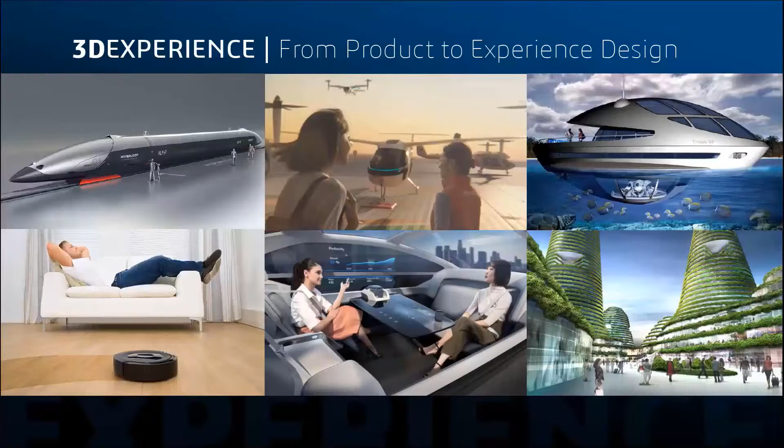Consumers all over the globe today expect holistic consumer experiences. Realizing this paradigm shift, companies have embarked on a journey to move away from simple product design to a delivery of much more sophisticated consumer experiences to the market. This also means a shift to a more human-centric design approach, as a wider scope of parameters of human interaction need to be considered when designing them.

In this new age of consumer experience economy, companies are challenged in many ways. First of all, they need to make sure to transform from classic product to human-centric experience design to gain or keep the necessary edge in creativity and innovation required to reach a leadership position in any market or niche today. Secondly, customer loyalty and a strong brand identity are vital to increase and sustain high revenues and profit margins, which is why design quality and efficient homologation processes are of biggest importance.

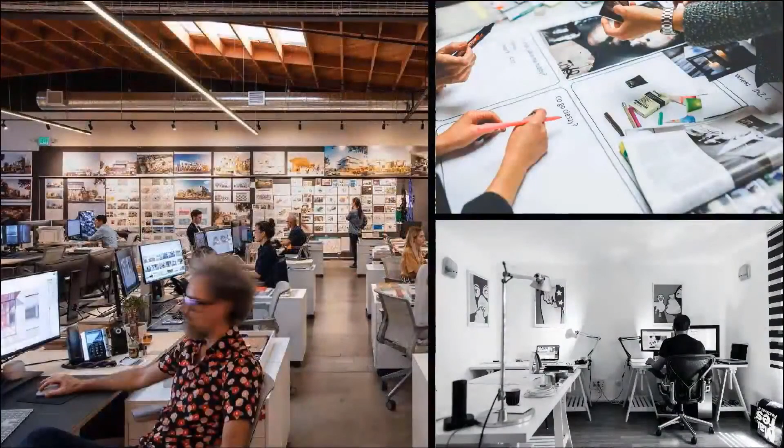Last but not least, the sheer number of products and experiences the markets are expecting today requires streamlined and agile design, engineering and manufacturing processes. These cannot be achieved with silos or stakeholders inside and outside of a company's ecosystem being disconnected. One of the most important people and organizations to drive this paradigm shift are those we consider nowadays at the forefront of innovation, designers and design studios.

In a historical context, this is a relatively new perception. In the not-so-distant past, industrial design used to be an afterthought, a means to improve the aesthetic perception of a product, to make it appealing, but hardly at the core of the innovation process itself. Consequently, designers were only given a limited upfront responsibility in a very narrow area of the product development process.

Today, designers have a much bigger role and responsibility than ever before. Their role is considered key to define new exciting customer experiences that make a difference between success or failure for a company. How do we in Dassault Systèmes tie into this picture, you may ask? And the answer is quite simple.

By definition, the purpose of Dassault Systèmes is to provide businesses and people with 3D experience universes to imagine sustainable innovations capable of harmonizing product, nature, and life, which sums up some of the core aspects of what designers are trying to achieve today.

One of the keys to this harmonization is to reconsider the foundation of how products or experiences are conceived. Thankfully, some foundational work was already done in the 60s. These efforts culminated in the creation of one of the most widely accepted methodologies of structuring creative processes today, called design thinking. While it would be going beyond the constraints of this presentation to explain design thinking in depth, we will try to simplify.

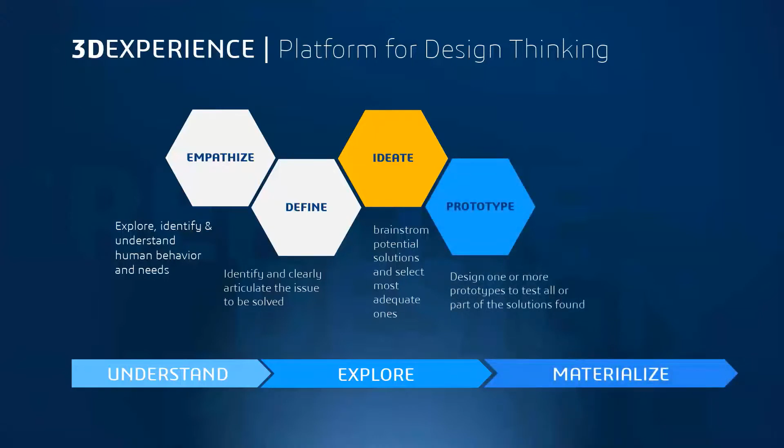In the ideate stage, we explore the available solution space to address the problem identified in the previous stages. In the prototype stage, we create first prototypes which incorporate parts or the full solution to the problem. Finally, in test, we verify the prototypes. This will lead either to their acceptance or rejection and a loop.

It should be obvious by now that design thinking requires a multidisciplinary approach based on intense collaboration, sharing of know-how, breaking conventional silos, and substantially a change in how people and teams work, interact, and create.

We believe that the 3D Experience platform is the ideal basis and starting point for any organization seeking to innovate based on the design thinking philosophy. More than that, we are convinced that the 3D Experience platform is the game changer for creatives and design studios to master their challenges ahead.

With the 3D Experience platform, a Catia creative design experience, we are delivering a truly unified industrial design workflow for creative designers, supporting the design thinking method.

However, it is important to mention that our legacy and standalone solutions are still a vital part of our offering. While they do not match the capabilities and technological possibilities of our platform-based solutions, we do provide seamless interoperability and workflows between these applications, and we are continuously delivering new capabilities and experiences which our existing legacy solution customers are expecting.

Within the creative design experience, we find 3 categories which cover all creative design processes today. Within the first domain, creative design, we offer industry processes, roles and applications on the 3D Experience which focus on creativity, ideation, and the concept stages.

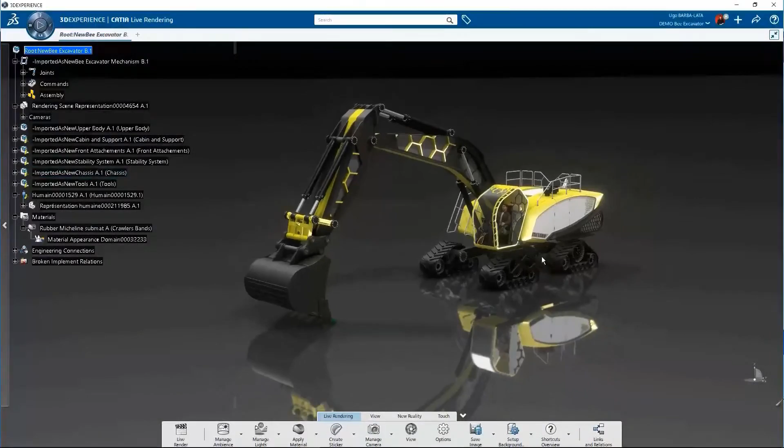All good industrial design needs to be human-centric. Supporting this view, we created the human experience applications in order to provide designers a human reference in 3D space at any point in the design process, whether in the ideation or the later test stages. For this reason, we provide the 3D mannequin with all the core creative design experience roles by default.

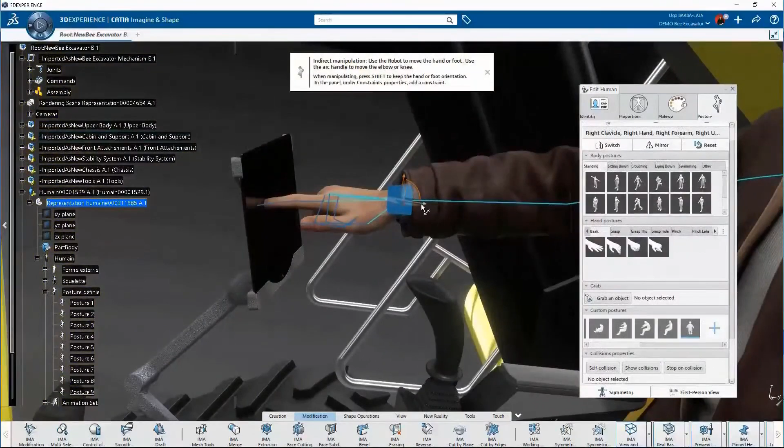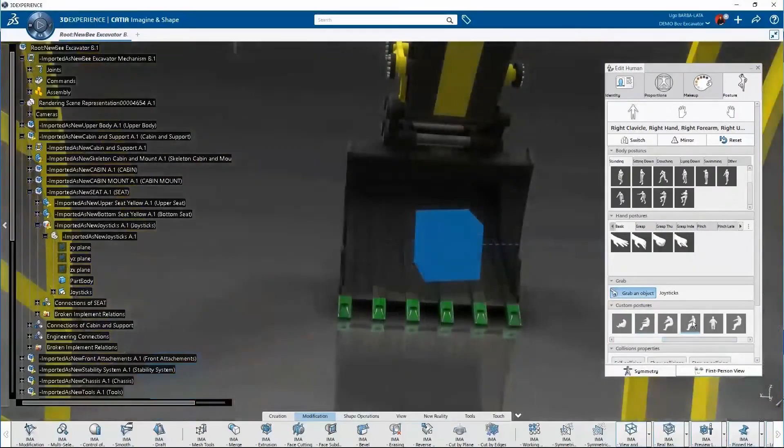This mannequin is available in many different variations and can be customized in size, proportions, visual traits, and postures. While it is an accurate 3D representation of humans, it does not claim to be a scientifically approved representation. This type of mannequin will be incorporated in a later release of 3D Experience. Anyway, with this current level of detail and exactness, we believe it's appropriate for all creative design related activities to start with.

In terms of technology, the mannequin body is driven by an underlying inverse kinematic rig, which allows for quick changes of postures. With a vast set of postures already available out of the box in the core application and changes possible on the fly, a big part of possible user scenarios should be addressable.

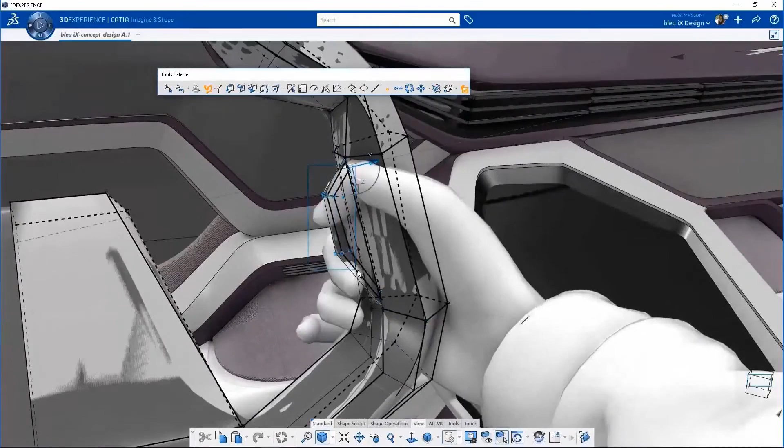Additionally, we implemented features like the grab object function, which will drive the shape of the hands of the mannequin based upon collision detection. Interactions with objects thereby are automatically taken care of, and it does not require additional attention by the user or a dedicated process to make sure hand and finger positions are accurate.

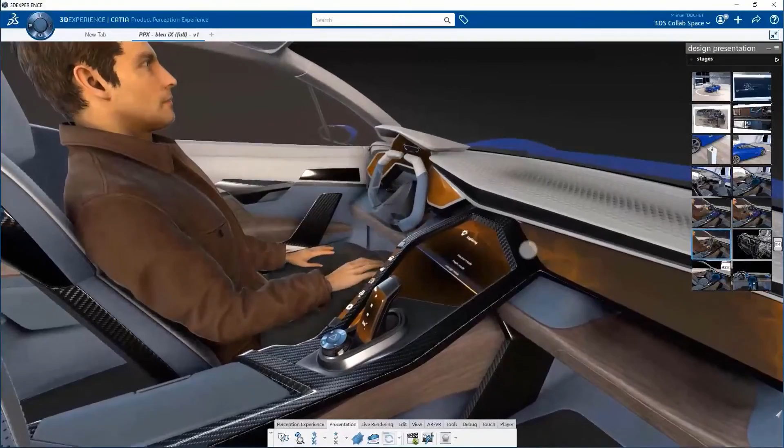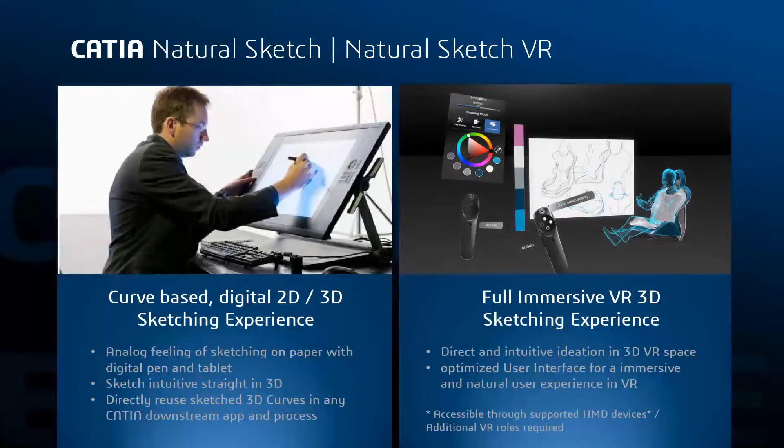Analog 2D sketching with pen and paper or digitally in 2D is still very appealing to creatives and designers. As one of the most common cultural techniques known to mankind, we write and draw from an early age. There's an immediateness between thought and a first representation on paper which is hard to beat. We want to enable designers to create spatially correct digital 2D and 3D sketches in a very intuitive way, which is why we offer our Catia Natural Sketch application in all of our core creative roles.

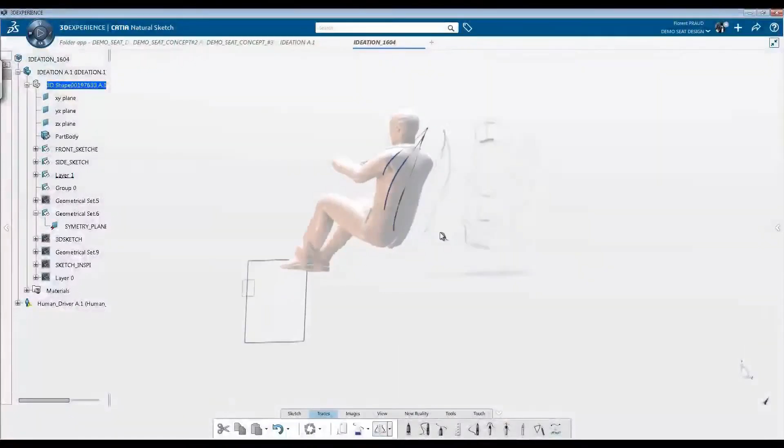Natural Sketch allows users to work as analog as possible, replacing pen and paper with digital pen and a tablet, while at the same time expanding sketching to the third dimension. Lately we have been expanding the application with a fully immersive VR experience, such that direct sketching in 3D is possible with supported VR head-mounted display devices.

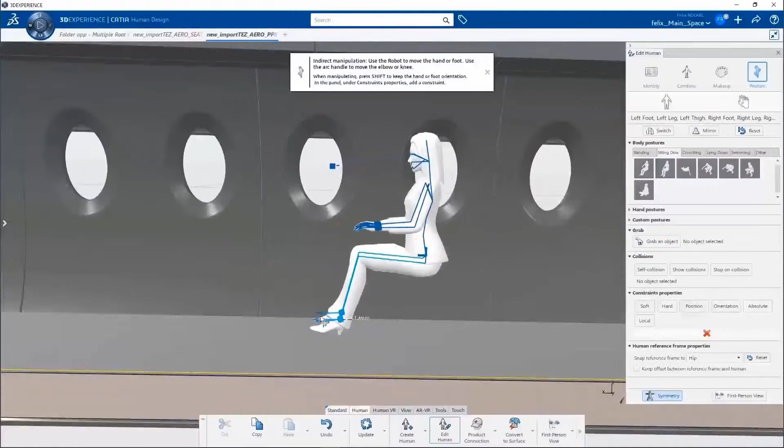Important to note is that we are not trying to mimic simple pixel-based workflows as with popular photo editing software. Instead, both applications deliver Bezier curve output if wanted, which can be passed to any downstream Catia processes and applications, ensuring a digital continuum. Consequently, it means that the design intent of creatives will be preserved at maximum level when passing to the other stakeholders in the project, which is often not the case when the output is based on 2D sketches.

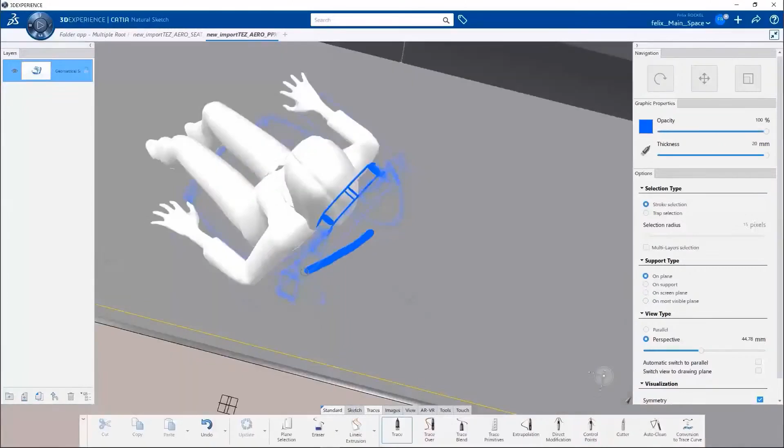The biggest benefit of being in a Catia 3D environment is to be able to use existing 3D geometry and parts as reference for the initial design. As outlined before, the 3D mannequins provided by our Human Design application allow designers to start their sketching process with a human reference from the beginning. In the end, designers are able to deliver spatially correct 3D sketches, which are taking into account important technical constraints and have correct relations to human proportions and sizes.

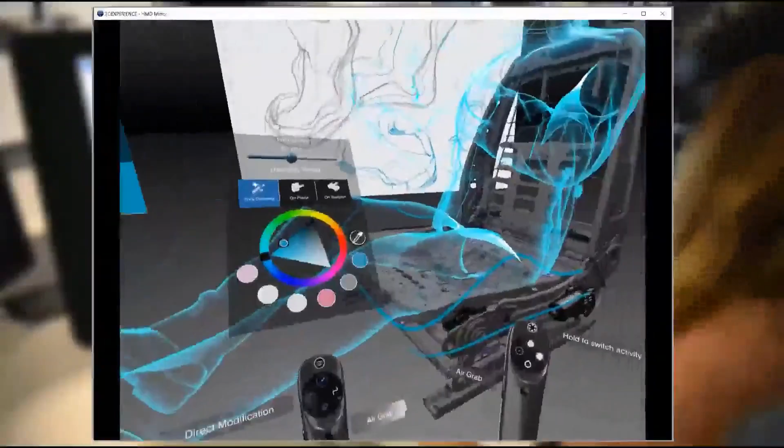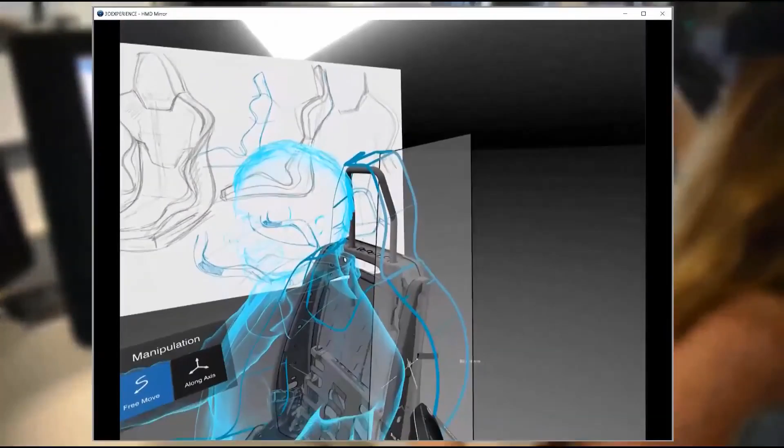With Natural Sketch VR, we are expanding the classical Natural Sketch application by introducing a fully immersive VR experience on top of the core application. Thanks to the full immersion, proportions and shape can be experienced more realistically and in life size. A dedicated VR-optimized user interface allows to create designs directly in 3D space without the need to use digital pen or tablet, but with the controllers of the VR head-mounted display. Nevertheless, as both experiences are equally capable to create 3D sketches, we think that a hybrid approach could be beneficial.

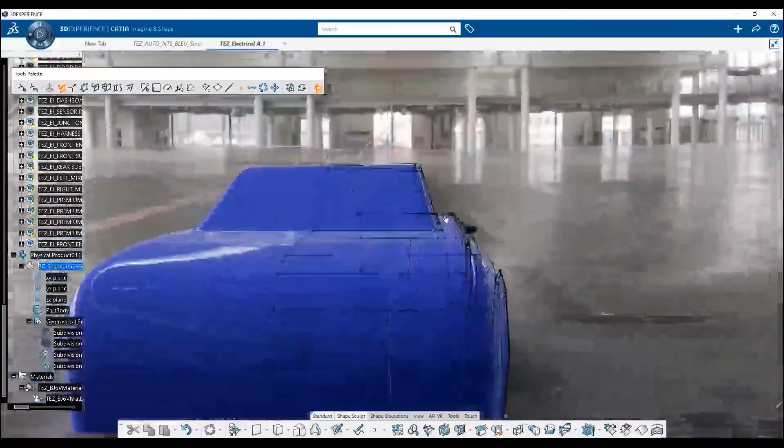Moving on to concept modeling, let's have a look at Catia Imagine and Shape. Whether you are starting out based on the curves created by Natural Sketch or from scratch, Imagine and Shape enables users to create quickly curvature continuous quality surfaces while at the same time avoiding all the intricacies of classic surface modelers. Using subdivision surface technologies, Imagine and Shape is delivering a unique modeling experience.

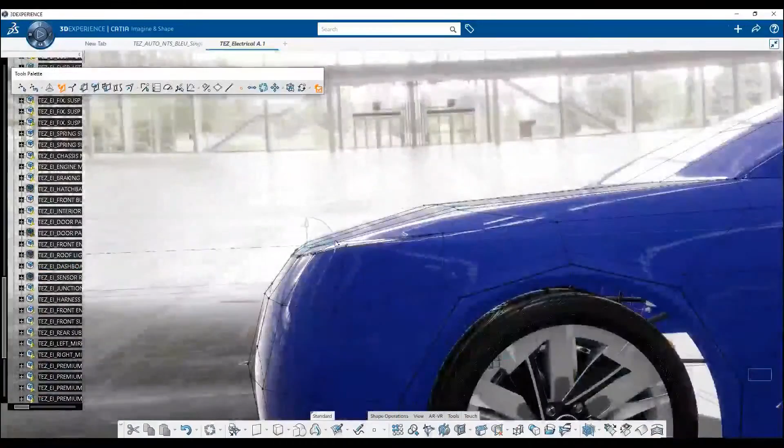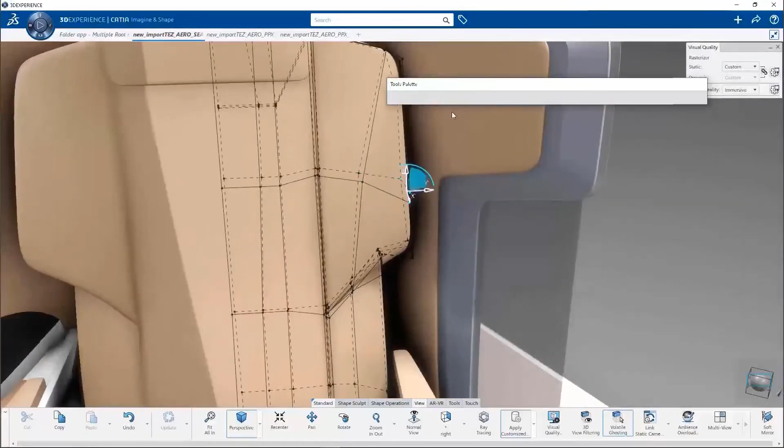While the creation of the base mesh follows the rules of polygon modeling and is in line with most other polygon modelers on the market, the biggest difference is that the Catia Geometric Modeler core allows to create a Catia surface in real time in parallel. This is unique. This means first that there is no need for a follow-up process to create usable surfaces from the polygons, as this is already happening at the time of the base mesh creation in real time. Secondly, the surfaces created can be passed to any downstream process early on, for instance to engineering, such that activities can be started in parallel, saving decisive development time.

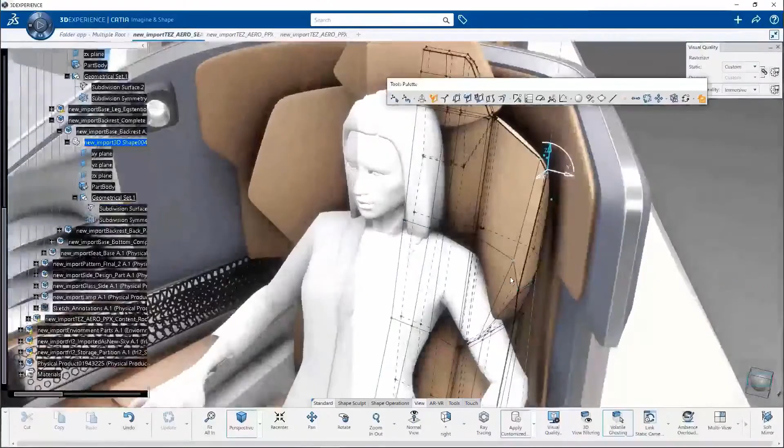But maybe the biggest value for the users is the fact that we can mix subdivision surfaces and conventional NURBS or Bezier surfacing in the same model. So for instance, we can use Imagine and Shape surfaces to cut and split conventional surfaces, or vice versa, using functions like filleting on top of Imagine and Shape based surfaces.

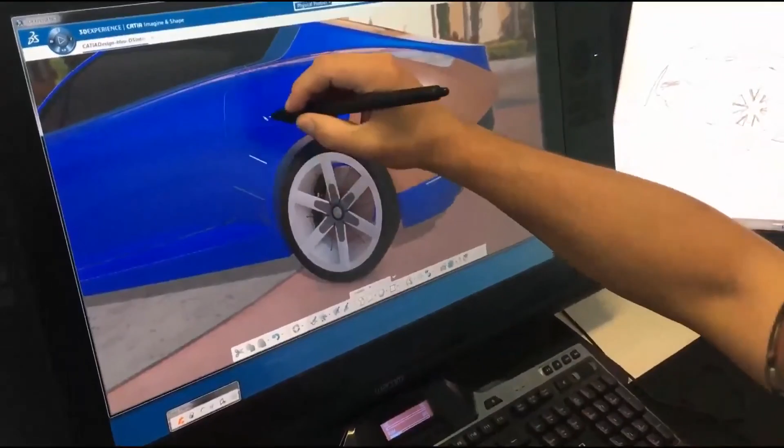Another use case for Imagine and Shape is in reverse engineering. Thanks to a specific function called strip drawing, designers, modelers, or engineers are able to quickly create or recreate parts of a design very rapidly by directly drawing strips onto scanned data or any existing surface data. Thanks to always snapping onto the underlying reference, it is very easy to create a base mesh which is already very close in deviation.

With the latest release of 3D Experience 2021X, we have introduced a new role called 3D Shape Designer, targeted at what we consider to be nomad designers. These are creatives which need a high degree of freedom in terms of accessibility of tools and mobility.

It is a cloud-based solution accessible via web browsers, which means that the applications can be used on mobile devices too. This provides users a high degree of design freedom, which is a unique feature of our web-based X application solutions. The designers are able to make full use of the power of the 3D Experience platform in the ideation

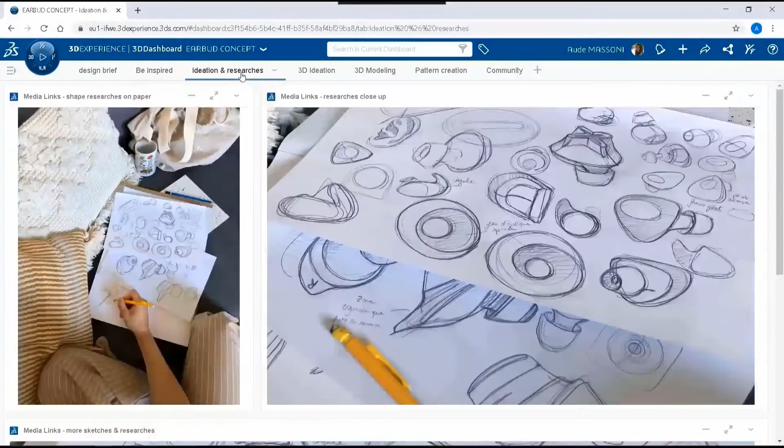stage already. Using the 3D dashboard functionality, we're able to gather all the relevant input for the ideation stage and create inspirational mood boards which we can share with clients or collaborators at any time. Using the XDesign app through a web browser, we are able to intuitively create the necessary mechanical elements of our

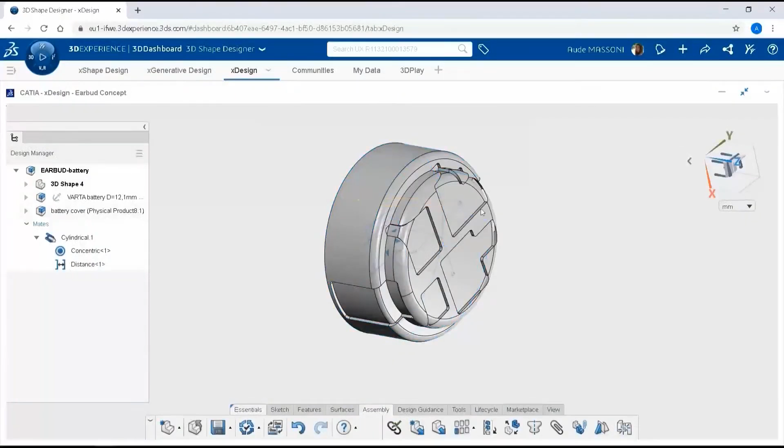design with dedicated functionalities. With some context geometry imported, we are able to seamlessly move over then to X-Shape app to create those parts of the earbuds which are in contact with the ears of the users. Thanks to subdivision modeling technology, we are able to quickly create elegant and smooth organic shapes.

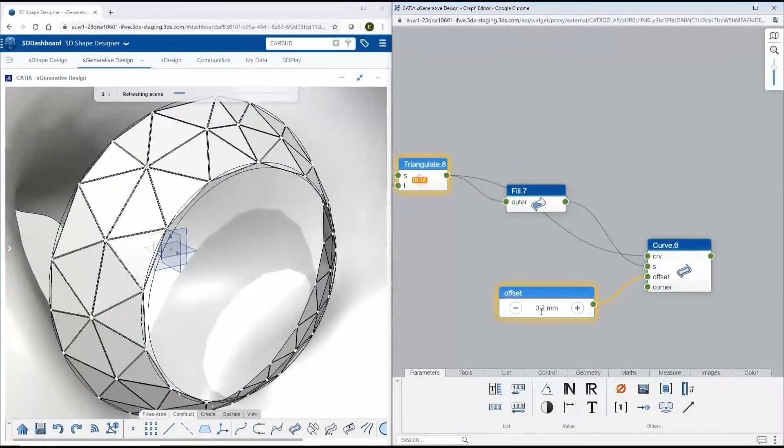Once the basic modeling is done, we can move over to xGenerative Design in order to create 3D patterns using a node-based algorithmic approach. Let's move over to the next category called Surface Refinement, which takes care of the community of Class A surface modelers and creatives and engineers in need for higher quality surfaces.

Historically, ICEM Surf, as part of our portfolio, has been and still is the leader for explicit Class A modeling in the world. In order to address the needs of our customers for a fully integrated Class A solution inside Catia, we created CATIA ICEM Shape Design, which is a fully associative Class A modeling solution.

Introducing our latest newcomer in this domain, ICEM Design Experience is positioned as the new leading 3D experience-based solution for Class A modeling, which tries to incorporate and merge the two user communities and modeling philosophies into one.

Let's start with ICEM Surf. As previously mentioned, ICEM Surf is the leading explicit Class A surface modeling solution today on the market. It is used in basically every company in transportation and mobility industry today and continues to be the best-in-class tool for creating exterior and interior surfaces, and as such satisfies the need for highest quality surfaces also in other

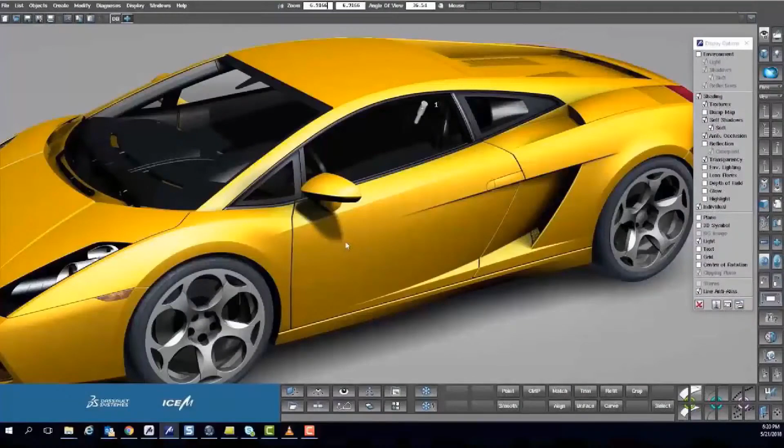industries. The year 2020 is remarkable for the development of ICEM Surf, as it shows our dedication to further develop and improve the solution and make it ready for the years to come. In 2020, we started a new 3-year modernization initiative focusing on addressing the requirements of our customers to allow them making use of the latest news in GPU development and technologies, while at the same time improving the overall user experience and overall performances quite substantially.

This is a brief overview of the currently available modules, with ICEM Surf Professional being the entry point and additional modules to address customer needs for dedicated functionalities and use cases, for example for safety analysis and so on. I would like to highlight the fact that with the K63 module, we also offer an integrated VR experience for ICEM Surf, and it has been very popular with our customers around the globe.

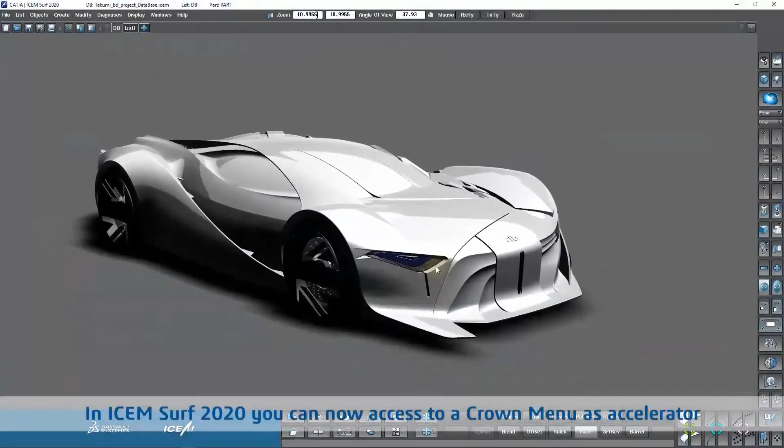As a new feature of the ICEM Surf 2020 release, we introduced the Quick Access Functions menu, helping to save time and mouse miles for a smooth and very efficient modeling experience. Using the spacebar and mouse buttons in conjunction, a default set of carefully selected functions is directly accessible from the Quick Access menu.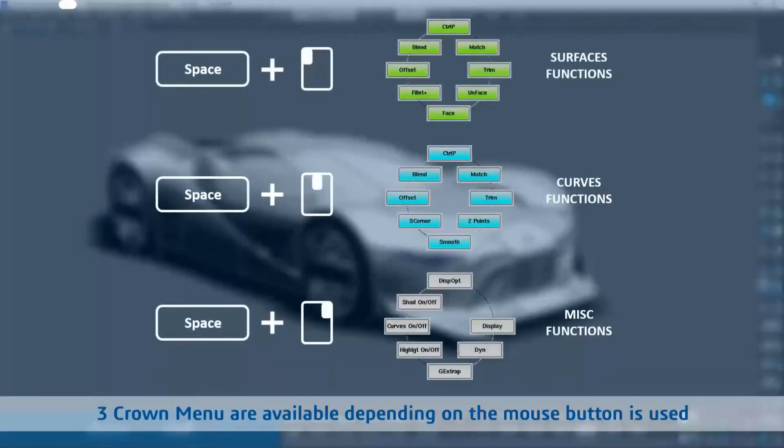Here we show an example of a quick functions access calling up the unface, modify control point, and matching commands. It is very easy to customize. Just choose your favorite function and link it to your preferred mouse button, and you're ready to go.

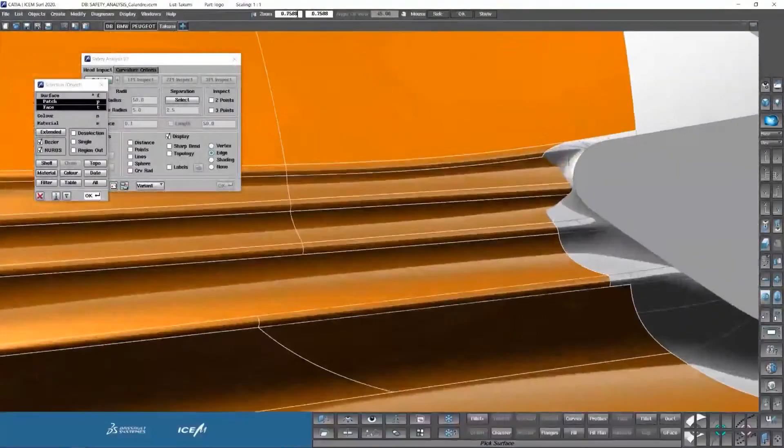In ICEM Surf 2020.1, the safety analysis function has been massively improved. New interface and now multi-threading support have drastically reduced the calculation times. The complete analysis is done in one pass, and you can create global analysis for all contact spheres with 1, 2, or 3 contact points on the fly.

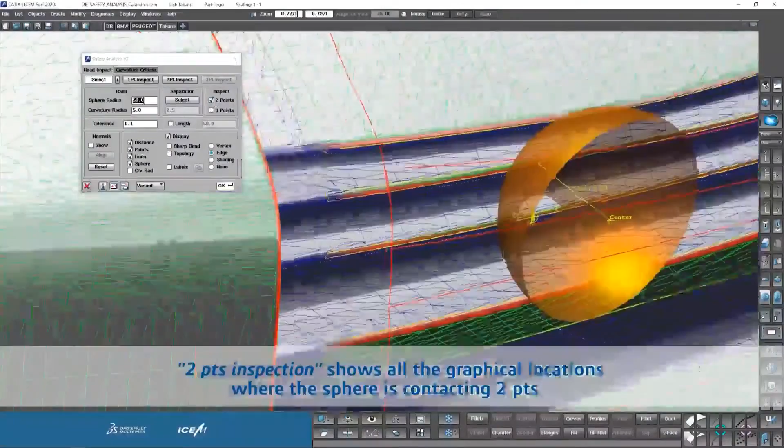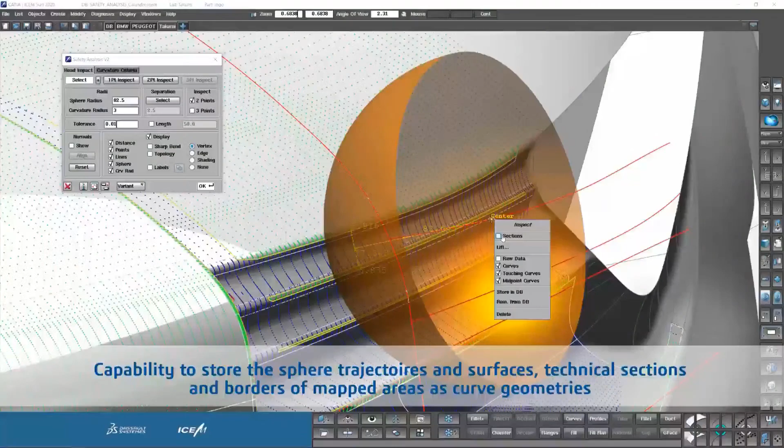The sphere and the centerline's points are clearly displayed. With 2-point inspection, you can now dynamically slide the spheres along the centerlines for a better understanding. With 3-point inspection, you can choose at which center point you want to show your sphere. You can store these new traces then in the database to highlight any problem areas for downstream investigations. A complete new grill distance criteria has also been added.

Let's have a look at our offering for parametric and associative modeling with CATIA ICEM. Complementary to ICEM Surf, CATIA ICEM is a fully integrated Catia application for modeling Class A surfaces, powered by ICEM Surf technology. As such, it is very popular with companies who are trying to connect styling and engineering for more efficiency and speed in the early phases of styling and design convergence.

Among our references are some of the most well-known automotive brands in the world. CATIA ICEM enjoys huge popularity with companies like Fiat Chrysler Automobiles in Class A, and with Ital Design, for instance, for grey zone and body-in-white engineering most prominently. Aside from Class A modeling, it has been very successful in the domain of fuselage design for planes, but also for lofting the blades of huge windmills in the energy sector.

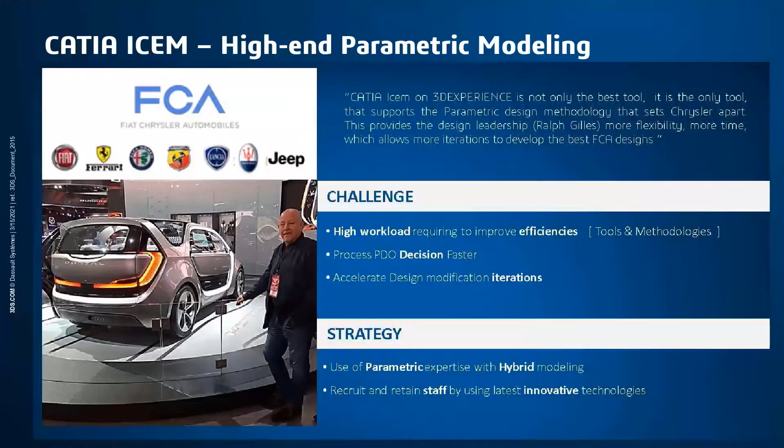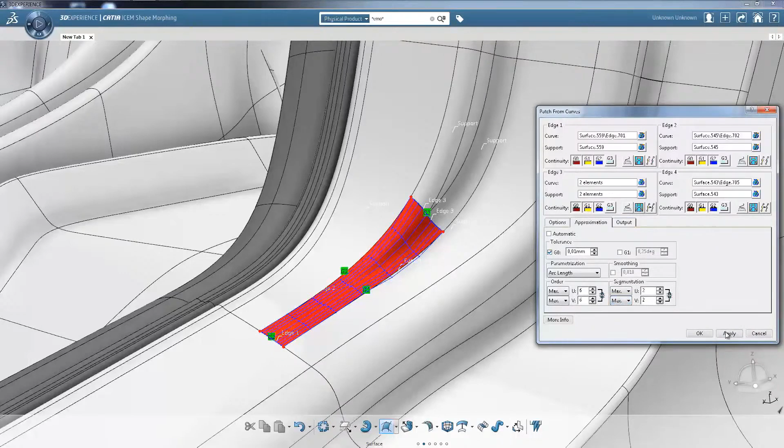The benefits of CATIA ICEM are clearly that changes at any point of the modeling are much easier to incorporate, thanks to the associativity of features, which will update on changing inputs like the base surfaces. Adding full parameterization, users of CATIA ICEM are able to enrich their Class A surface workflows with the power of knowledge-aware relationships, intelligent templates, also known as power copies, and much more.

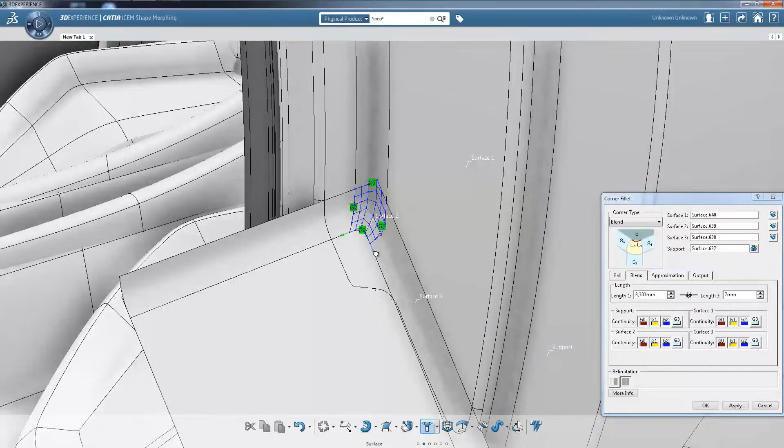For this reason, the application has also been very popular in body-in-white design and modeling the gray zone areas of cars. While having the same level of associativity and parametrics as our Catia standard surfacing module Generative Shape Design, CATIA ICEM is delivering superior surface quality and dedicated functionalities, for instance like the sophisticated gap functions to automate workflows and save substantial time compared to a conventional explicit Class A workflow.

With our latest edition, ICEM Design Experience, we are yet expanding the possibilities of Class A modeling again. By combining the best of both worlds, explicit and associative modeling, the all-new ICEM Design Experience is offering a new user experience and a new modeling paradigm for Class A on the 3D Experience platform, based on what we call soft parametric modeling. With IDX, we deliver a new level of productivity and innovation.

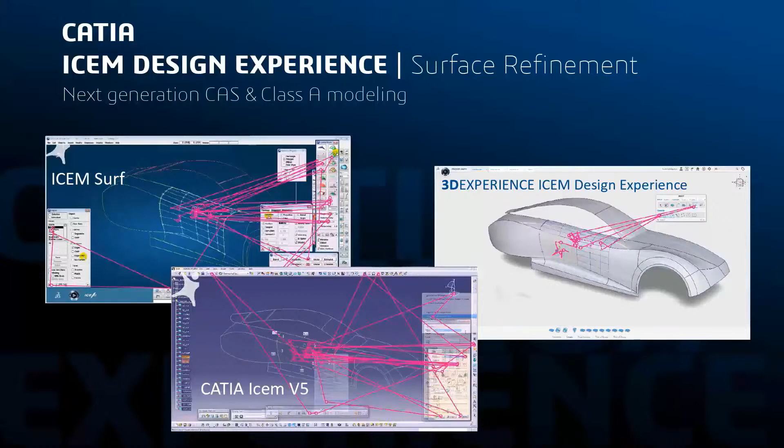We have been studying the user experiences in our current solutions and focused on reducing mouse mileage and clicks. We want to offer a new user and modeling experience to customers of our own legacy solutions like ICEM Surf, but also those moving over from our competitors' solutions. ICEM Design Experience is dedicated to creatives, CAS, and classic Class A modelers alike.

Now let's see the new paradigm in action on this example of a hood. We've implemented one single command to generate all possible surfaces based on our new Omni technology. The user defines the inputs to what we call the Omnisurf command, and the decider will offer surface results which make sense considering the number and type of inputs.

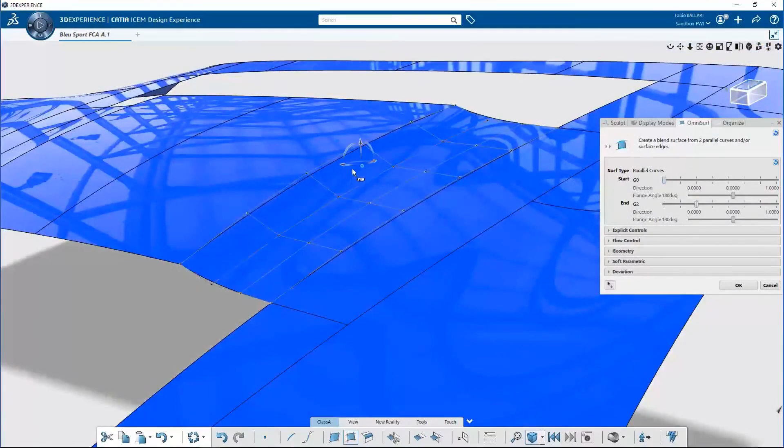In this case, the user is selecting the inputs, for instance 2 edges, and the decider will choose a blend surface as the most likely, in fact desired, option, and will create it. Thanks to the new user interface, we can switch over to the analysis by just a quick gesture based on mouse and keyboard shortcut combinations.

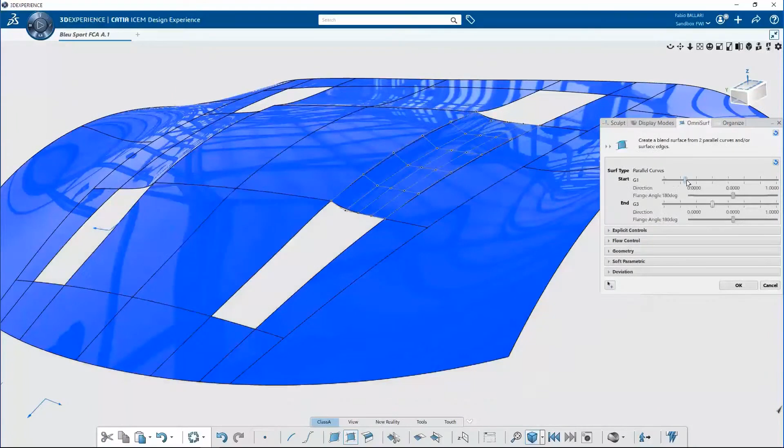It's also important to note that the users are free to directly manipulate the control points, as you just saw in that first blend. Should the user decide to select more elements like 4 edges, the decider will correctly assume that a patch from 4 edges needs to be created and will propose a surface of this type accordingly.

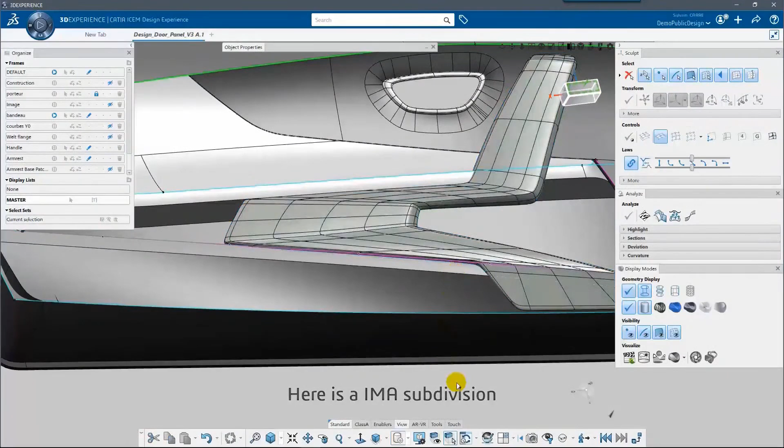In this example of what we call a unified modeling workflow, we brought together surfaces and surface features from all of our relevant creative design applications in Catia. Imagine & Shape for extremely quick and flexible concept modeling surfaces, ICEM technology to create the precision Bezier surface of highest quality, and on top the associative power of the Catia core.

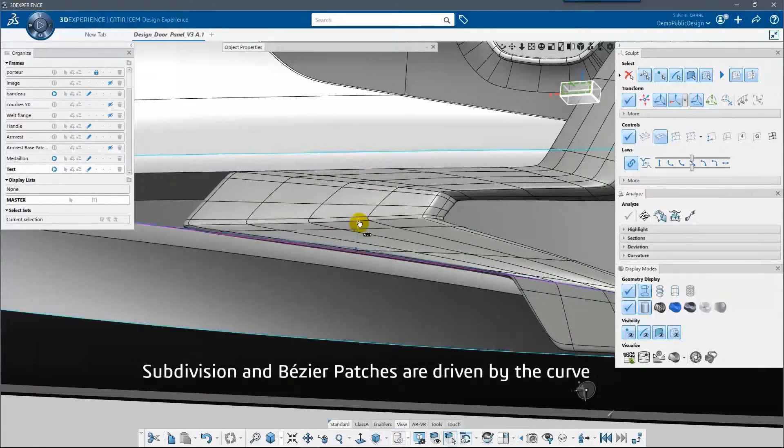With the new soft parametric approach, users are in full control of when changes are promoted to the geometric feature elements inside. Using so-called frames, updates on all or only selected parts of a model can be paused until the frame status is put back into the so-called play mode, to execute the update the next time it is triggered again.

Despite the trend in recent years, especially in transportation design, to move to a fully digital workflow, many customers on the other hand are reaffirming the need for physical prototypes and reverse engineering as an integral part of the design phase. They feel that physical models still deliver a better basis for design confirmation.

Nevertheless, while the process has been around for quite some time, it's not enough to simply go along and ignore the fact that a fully digital process saves money and time, especially considering the financial impacts of building a physical clay model. There's a need for increased productivity to get this process to a competitive level, which we believe is achieved by introducing more intelligent and automated elements in the reverse engineering process. The motto is to automate to the max, but at the same time ensure that there is predictability and the quality of the outcome is ensured.

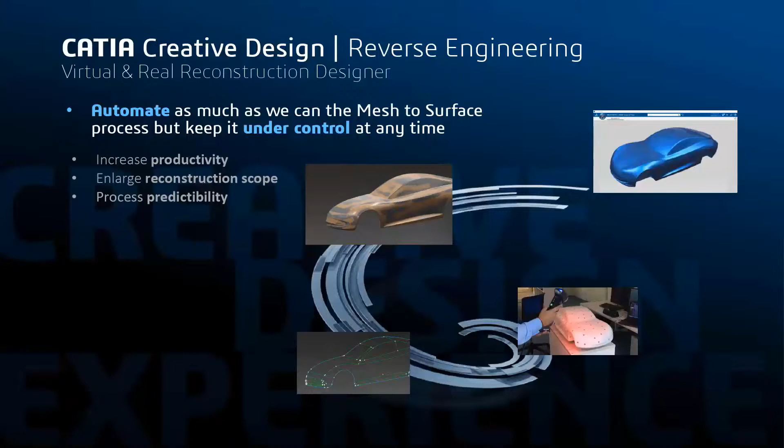For this reason, we introduced new functionalities like the fictive edge command or the reworked surface network command, amongst others, to accelerate the overall workflow decisively.

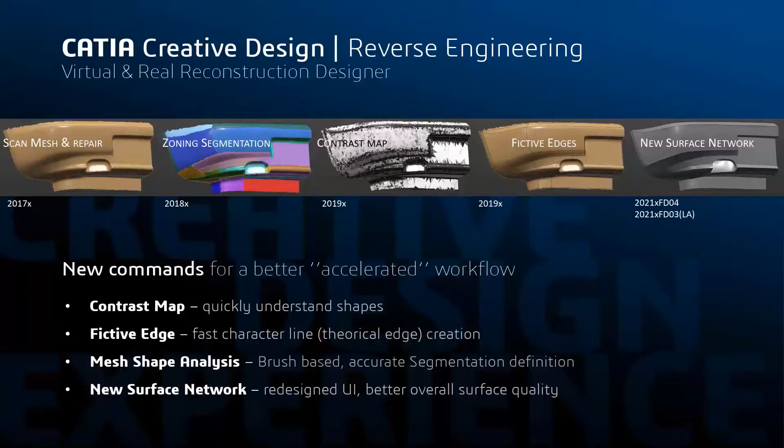The new fictive edge command allows modelers and engineers to recreate the so-called theoretical edge from a scan or other existing geometry. It represents the theoretical intersection of two base surfaces, which creates an edge that is one of the basic building blocks of Class A methodology.

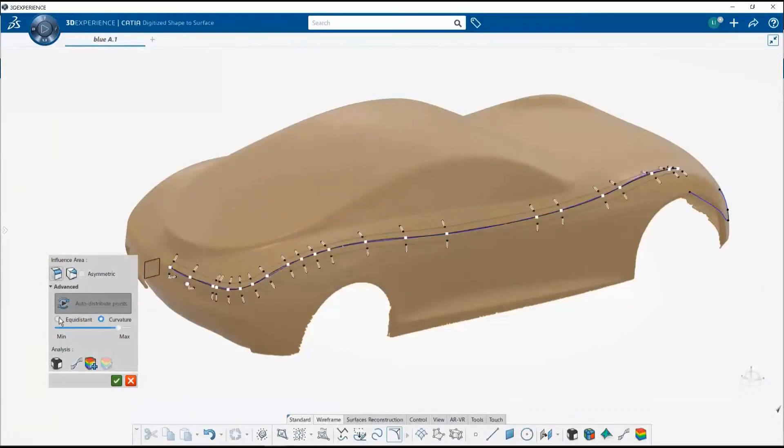While these types of hard edges are for sure not present in any final model, it is because these edges will be filleted or blend surfaces will be put in place. Recovering them from scan data is therefore of highest importance, as they will be the basis for any following refinements.

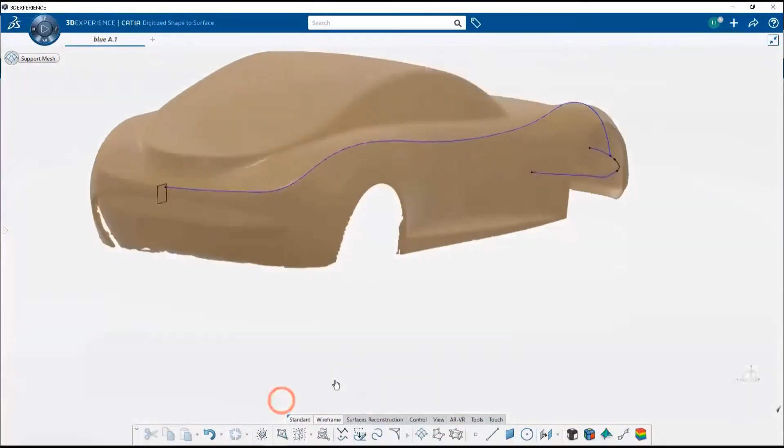As you can see, the change of curvature on both sides, left and right, to the points indicated by the user will be taken into account in order to reverse engineer the position and shape of the underlying theoretical edge in real time. These reverse engineered edges are then used to create a curve network, which is fed as input to the redesigned surface network command.

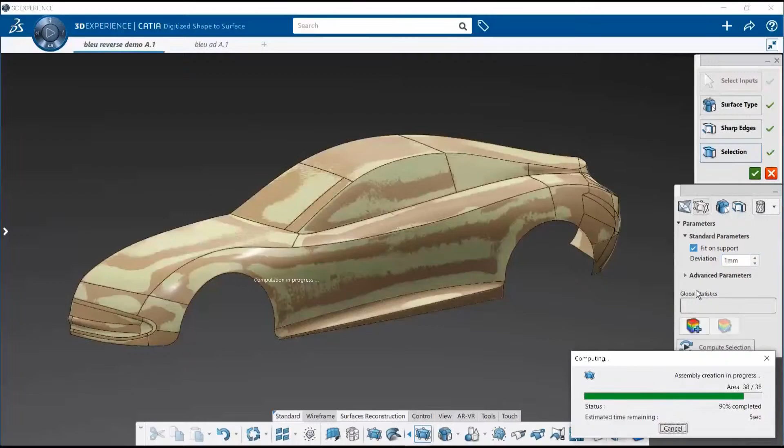This function will create surfaces within a given tolerance to the underlying mesh in one click. First tests with customers have already shown it reduces the whole process from days to hours, and as we continue to work on improving the solution, we've already realized additional gains since the first release and are still expecting to improve in the coming ones.

Moving over to the next category, let's have a look at our solutions for product experience. Let's start with the classical domain of high-end visualization first.

Our standalone application DeltaGen is the high-end visualization software outside of the 3D Experience platform to visualize your digital twin with the highest possible level of realism and quality. It is the go-to solution for customers in the automotive industry to drive their high-end visualization processes and pipelines. It allows converting and optimizing CAD data of various formats.

The stellar render engine and its outstanding global illumination mode, plus the integration of our new DSPBR technology and the AXF format for scanned materials, will allow DeltaGen users to represent any product in an unmatched lifelike quality.

The new release 2021X on top features new functionalities focusing on advanced lighting for automotive, and introduces luminance and illuminance passes based on photometrics as highlights.

On top of our core module DeltaGen, various add-on modules are available for specific use cases like tolerance visualization for perceived quality studies, for instance.

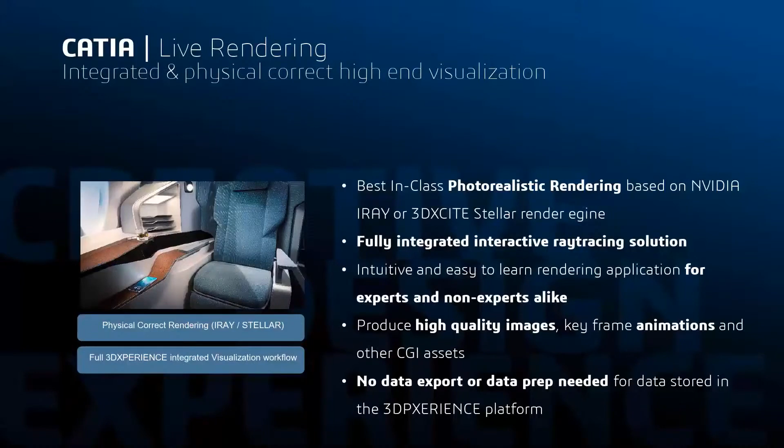The application allows you to visualize your 3D data on the platform with the highest possible level of realism and quality. Thanks to its integration into the 3D Experience, there are several advantages over a standalone rendering solution.

First of all, we can use 3D data coming from the 3D Experience platform straight inside Live Rendering, as there is no need for data export or data prep. Thanks to the data management on the platform, we can be sure to use the latest and current data sets, which is the most important issue many visual artists face today.

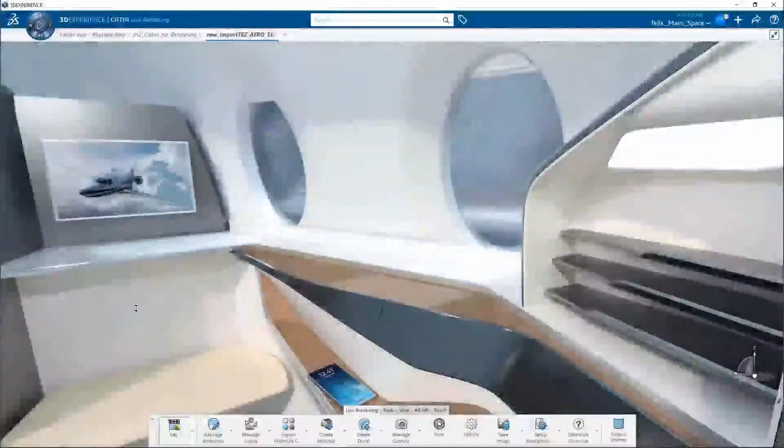Overall, this means that apart from applying materials, there are no additional steps between creation and visualization. Live Rendering does expand the boundaries in a sense that visualization can now be done on the fly at any point in the development process, based on production data.

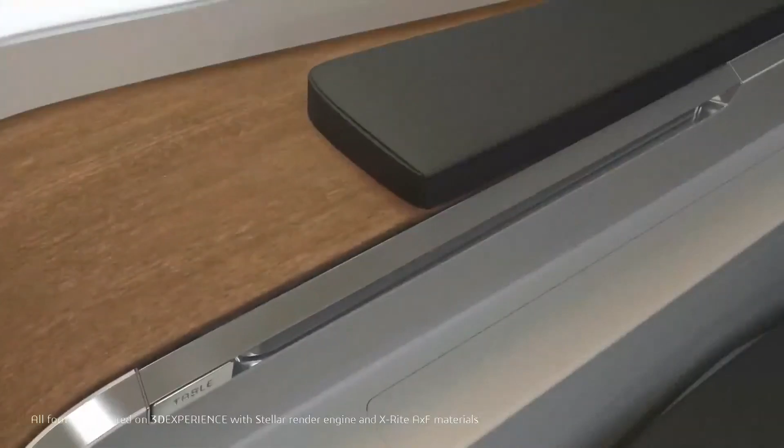Creatives and modelers are now able to create visualizations at any time without the need of getting experts in the loop and with limited windows of opportunity to do so. On our 3D Experience 2021X FD03 release, we introduce a new role called Distributed Live Rendering.

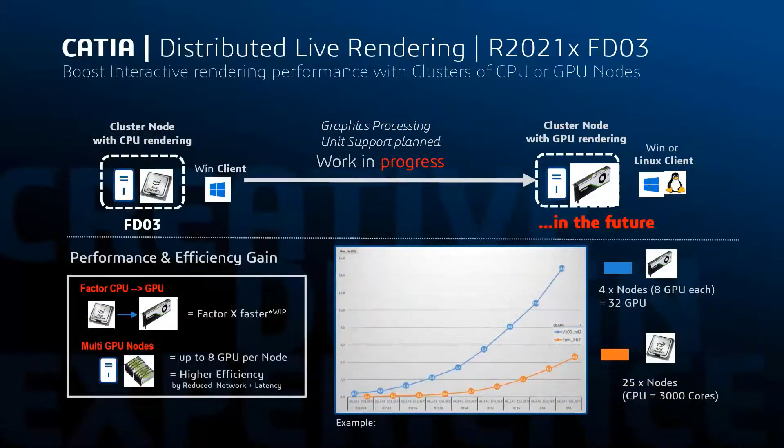It will allow companies to scale their visualization process using cluster setups. As a result, interactive rendering and batch rendering times in live rendering can be reduced substantially, making highest realism in real time possible. The current solution supports CPU-based clusters for now only, but GPU clusters will most likely be in a future release of 3D Experience.

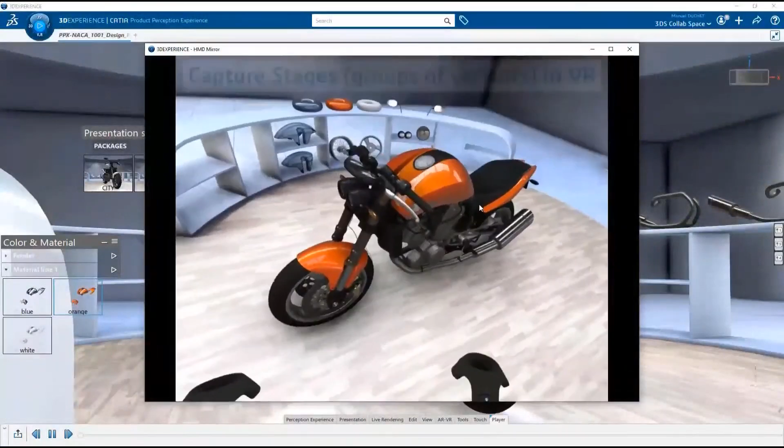For design reviews and decision making, we have introduced the Product Design Presenter role, which allows creating interactive sessions based on current production data on the platform with only a minimum of preparation time. Thanks to the Product Perception Experience application, we can create product and material variants and save them alongside camera views for performing interactive, immersive or non-immersive design reviews and product presentations. In the FD03 release of 3D Experience 2021X, it's now also possible to capture the stages within the VR environment for later use in a conventional desktop mode.

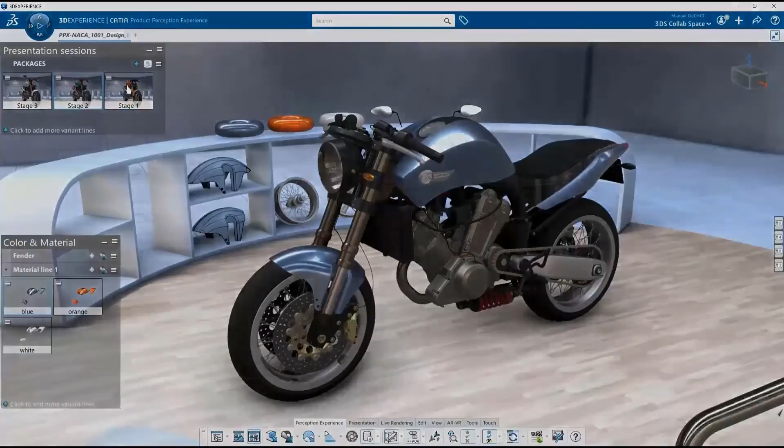Let's take the time here to focus on some aspects of our offering on the 3D Experience platform, which we believe are unique to it, both in combination and accessibility.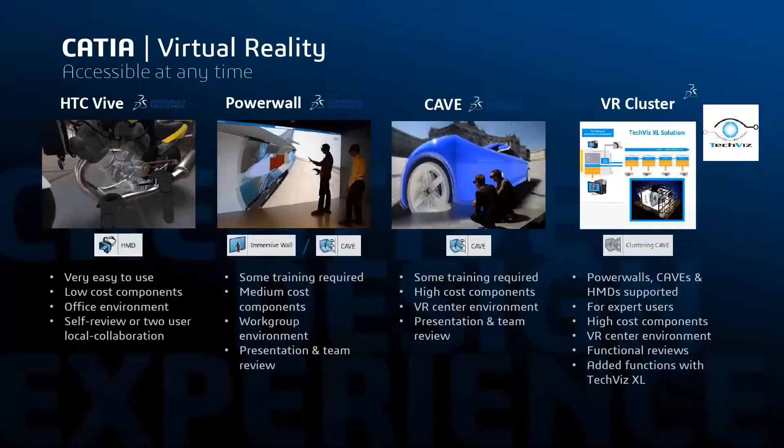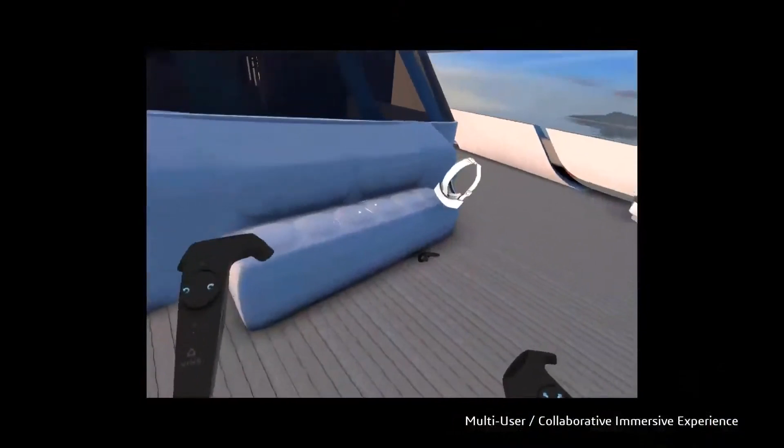Our offering for virtual reality and immersive experiences on the 3D Experience platform is pervasive, spanning from covering head-mounted displays and controllers to power wall setups, caves and even VR cluster setups. With a click of a button, users can switch from the standard desktop visualization mode to a fully immersive VR experience where they can even ideate and create 3D geometry in VR space.

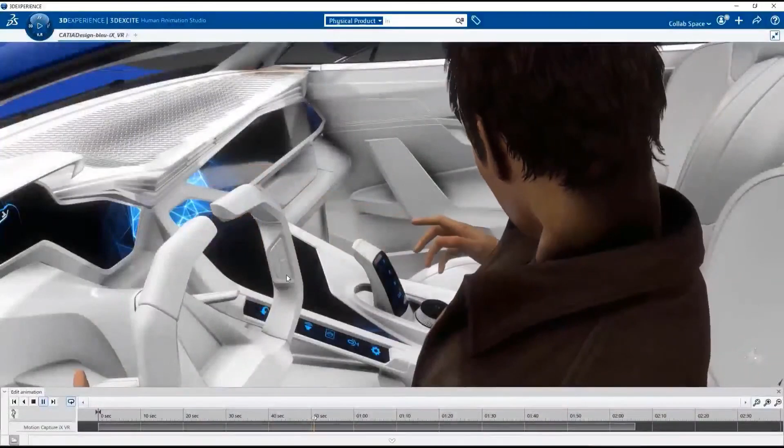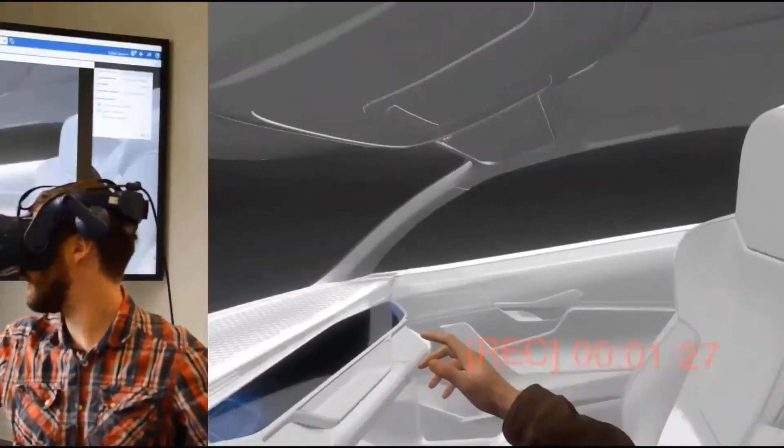As highlights to mention, we have introduced lately into our Human Experience Designer role the capability of active human incarnation and motion capture functionalities. With either one of the VR roles like Virtual Reality Reviewer, Immersive Visual Experience or Immersive Collaboration Experience, we can also add an immersive VR experience on top for ultimate realism.

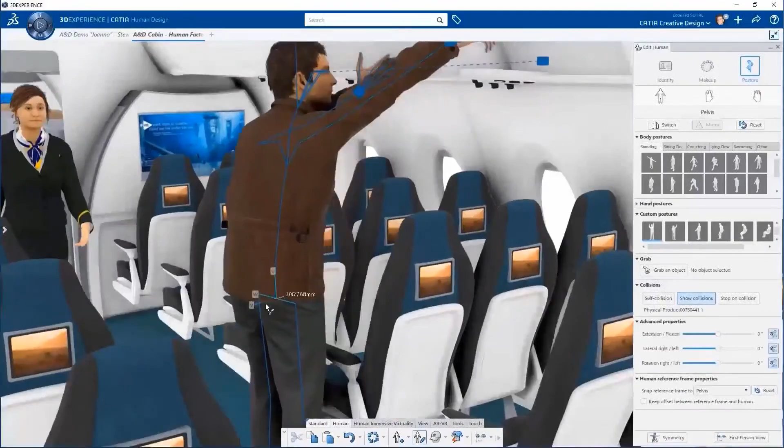In fact, the biggest benefit of having all these capabilities available on a common platform is that it enables designers to test new customer experiences in all relevant aspects in the virtual environment instead of doing so in expensive real-life trials. More than that, the customer experiences can be adjusted on the fly without the need to run through all of the postulated stages of the process again.

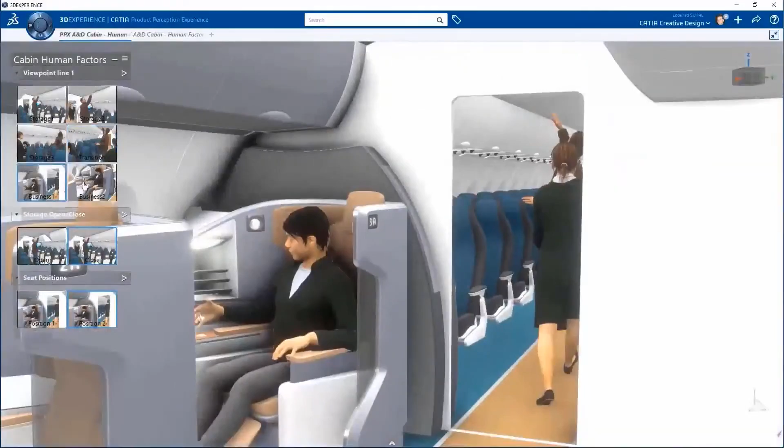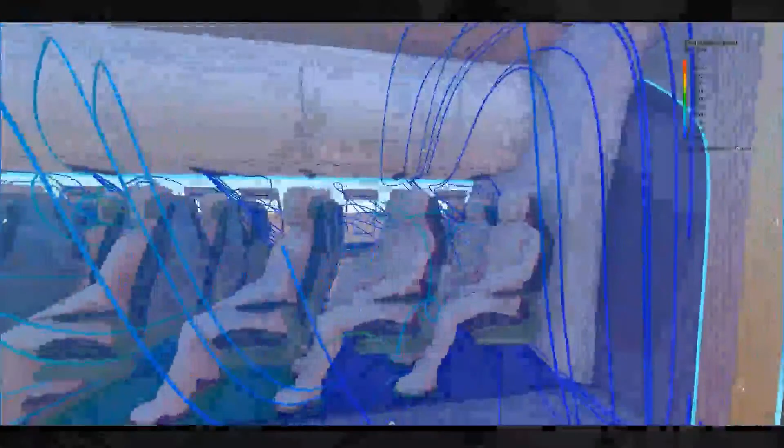Adding powerful simulation capabilities of Simulia to the equation, a truly empowering unified industrial workflow is available for creative designers for the first time thanks to the 3D Experience platform. While design thinking until now was considered to be a linear and repetitive back and forth between its stages, we can now move between them freely, which makes this creative design experience on the platform unique and truly a game changer for designers and creatives.

Finally, I would like to provide some background information about how our commercial offering for the 3D Experience platform is structured and which are the relevant bits for you in case you are an existing customer or interested to become one. On a primary level, Dassault Systèmes would like to serve customers with an offering which is tailored to specific needs of their industry. Within the industry categories we identified as the most relevant, we find the so-called industry solution experiences, which will define a specific field within said industry.

Inside, we find the industry process experiences. You can think of them as a bundle of roles that we put together for those processes we identify to be relevant in this particular field. Looking at this level, we see that different persona representing a specific function or role within a process or an organization have been identified. Below the roles, we would need to move to the application level, which has been featured along with the role level here in today's presentation most of the time.

In case you are already a 3D Experience customer, you should be able to access and explore our offering interactively through the platform, as you can see here in this video.

While for individual users and smaller organizations the role level is likely the most relevant, we think that design studios and bigger organizations in general are best served on the industry process experience level. It represents a meticulously tailored offering of roles to take full leverage of the unified industrial design workflow, which I tried to outline today in this presentation.